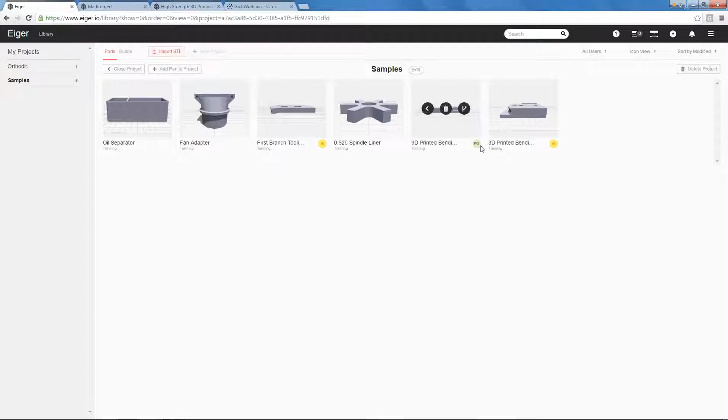I have an orthotic project, which has a sole model in there, which I will talk about when it comes to adding a pause feature to the models, and I also have a samples folder, and these are the sample parts that come with Eiger. These are parts that you can add fiber to, you can print them if you have a printer, but we highly recommend practicing with these particular parts, okay?

Before I get into importing any STLs, I want to just show you the resources. If you come up to the settings and click on support, it'll take you to our Markforged support page, and there's a wealth of information here that you should really review. We have information on getting started, troubleshooting information, the design guide, finishing parts, printer maintenance, advanced tips, and of course we have a frequently asked questions section which you should really go through.

It's a quick read. Down the left-hand column we have a bunch of other articles. It looks like there are a lot of articles, and there are, but they're very short articles, and it should take you no longer than an hour and a half to read through them all. And we recommend going through them as many times as you can so that the information can sink in.

One thing I would like to show you is the actual design guide to show you just how easy it is to create sandwich panels. What Eiger will do automatically is it will try to create sandwich panels on your parts when and where it can. Okay, there are some geometries where it won't, and we'll show you some of those in some upcoming parts. Okay, but what is a sandwich panel?

We're all very familiar with I-beams. And these I-beams have both a flange on the top and on the bottom, and it has a web in the middle. Each of these flanges, this is where the highest bending stresses are. So as such, if you create very rigid structures on both of these flanges, you can create very strong parts.

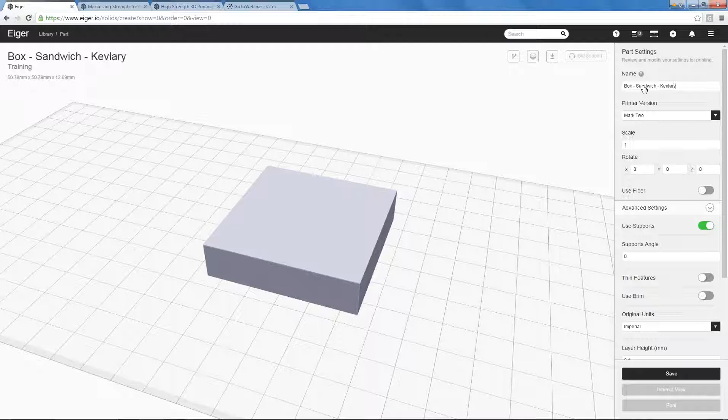Here we can change the name of it, and what I'm going to do is change the name of this box to sandwich, because I'm going to create a sandwich panel construction using Kevlar. I'm going to create different variations of this. The printer version is the Mark II.

Anyone that's joining in that may have a Mark I, I'm not sure if you realize this, maybe you do, but if you click on this printer version, you can actually select. By default, if you have a Mark I printer, the Mark I will show up, but you can actually select the Mark II and slice your parts and add fiber and take advantage of the features of the Mark II. You obviously won't be able to print those on your Mark I, but it'll give you an idea about the advancements with Eiger pertaining to the new Mark II printer.

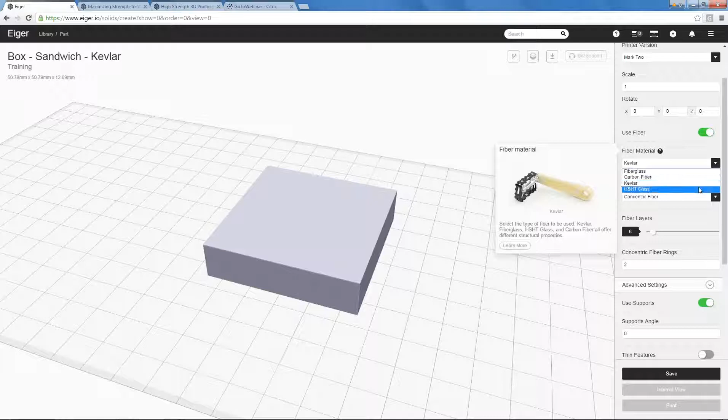This is where you can change the scale. Here you can rotate it on the X, Y, and Z axis, and of course we can use fiber. I'm going to turn fiber on. For most of these parts I'm going to use Kevlar because it best represents on the screen, especially for these demonstration purposes. I'm going to start with concentric fiber, but going back to the material types, I could have chosen fiberglass, carbon fiber, and of course our high strength, high temperature fiberglass. But again, I'm going to just stick with Kevlar for these demonstration models.

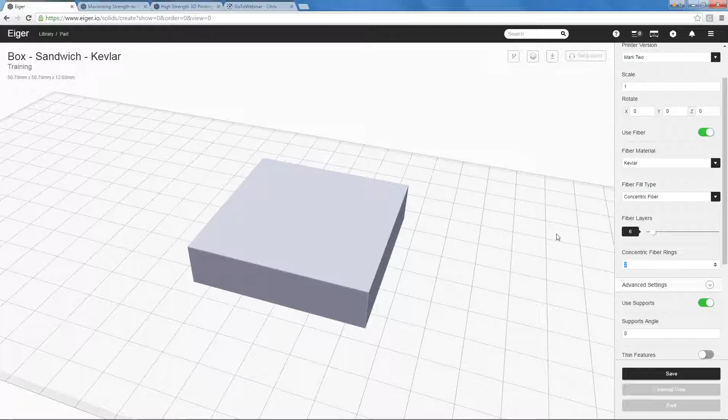And the fiber layers here, the 6 represents that Eiger will create or try to create 3 layers of concentric fiber on the bottom and 3 layers of concentric fiber on the top, hence the sandwich panel construction, and that'll give us 6 overall layers. The concentric fiber rings is set to 2. I'm going to bump this up to 10. You can use whatever you want, but we're just going to start with 10. And we're going to move down and set some of our other settings.

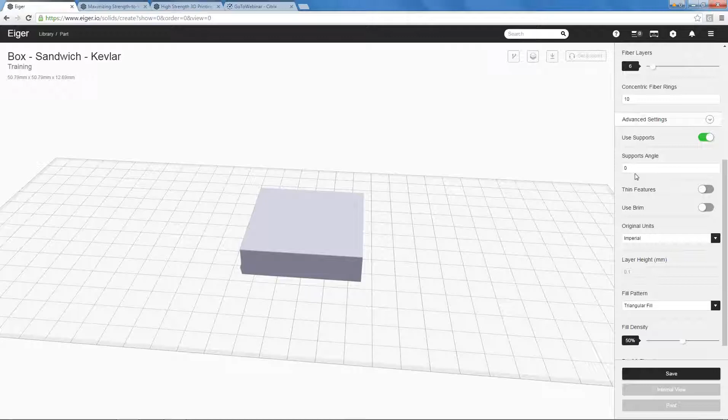Using supports is on by default. For this particular model, since there are no overhangs, supports will not be generated, okay? If there were supports generated, this field will allow us to adjust the support angles, and this can be very handy. By default, it's on 0, but if you had a part that had a very long overhang, using 0 may not be a good idea because you have very long runs of those supports, and by changing it to either 90 or 45 you can reduce the span of those supports, and it can at times prevent those supports from coming free on the build bed.

Okay, we're not going to talk much about this, but I just wanted to point it out and show you that that feature is available. Thin features and use brim, we'll use that in some upcoming parts. Again, my units for the models that I'll be presenting today are imperial, but it's either metric or imperial. The layer height shows you the layer height.

The layer height for nylon is either 0.1 millimeters or 100 microns, or it's 0.125 millimeters or 125 microns. And what the nylon adjusts to is the height of the actual fiber. For Kevlar and fiberglass, the layer height is 0.1 millimeters, 100 microns, so the nylon will adjust to that height. For carbon fiber it is 0.125 millimeters or 125 microns in the nylon. So that's just there for reference.

The fill patterns that you can choose are triangular. I generally use this by default. It produces the strongest part with this particular fill. You have a choice of hexagonal, which we will show, and of course we'll demonstrate when and why you would use rectangular fill. Okay. The fill density, you have total control of the fill density of the internal fill pattern. We're going to leave it on the default.

The roof and floor layers, these are the number of layers that are produced below the fiber layers. What this requires, whenever you put down fiber, it needs a very strong foundation to support the layers of fiber above it, and we will show that just shortly.

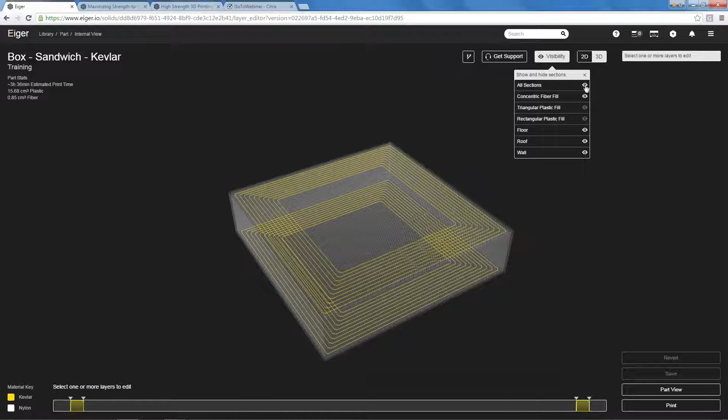Here in our 3D view, we can rotate the part in 3D space. We have a nice visibility tab up here where by default we actually turn off both the triangular plastic fill and the rectangular plastic fill, and we do this for a very good reason. If we turn on the plastic fill, as you can see here, it just makes the part very busy. So since you have the choice, how I view models is I'll usually turn it off. I'll turn on my concentric fiber and my walls, and I'll be able to get a good representation of where my fiber is. But let's return back to the default view.

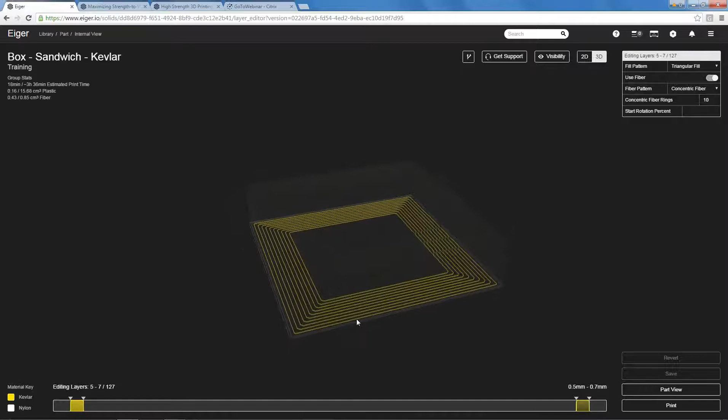Down here is our layer bar, and down here each fiber group is. If I click on it, I can see that I've selected layers 5 through 7, which is on the bottom, so I can highlight those. If I select the upper group, I'm selecting layers 121 through 123, and if I click in the workspace, it returns back to the 3D view.

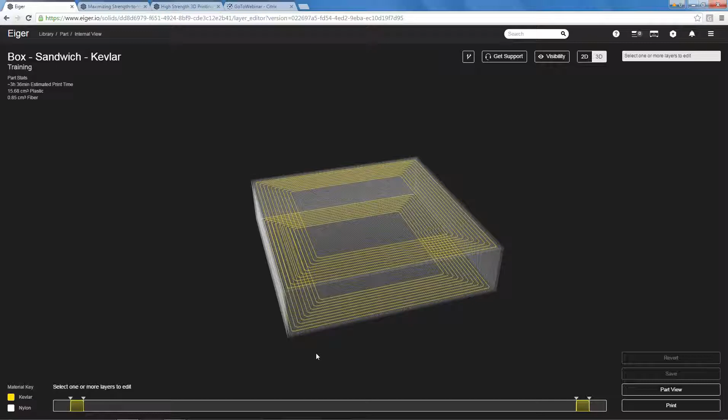Okay, now I can add fiber layers in bulk. In 3D view, we recommend using this view for adding layers of fiber in bulk. I will be adding layers in a clone version of this part, which I'll show in just a second, but let's go to 2D view. 2D view is a view of this part looking down at it in the Z-axis.

If I click in my workspace, I can actually use the right and left arrow keys and progress through the actual layers. Here we can see our 1, 2, 3 lower layers, the bottom of the sandwich panel, and if we scroll all the way up, I can obviously grab the slider and drag it up.

And as I mentioned before, the roof and floor layers are below the layers of the fiber. So below this we'll have 4 floor layers, 1, 2, 3, 4. It's actually 1 roof as designated by the outer stitching, followed by 3 floors, 1, 2, 3, and then of course we have our 3 layers of Kevlar on the top. Very simple. Those layers are added automatically.

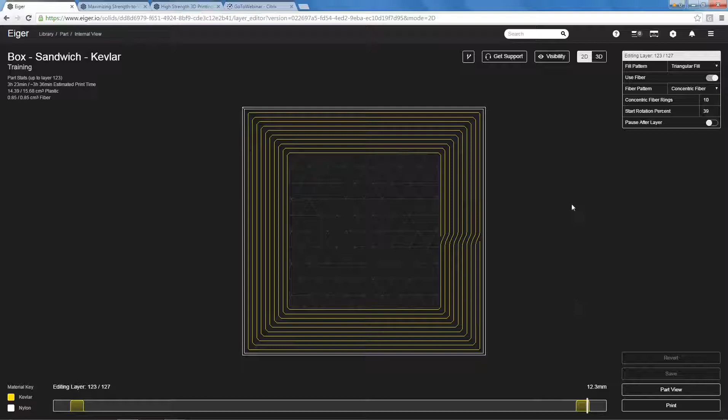You have total control of that within the part settings. I usually use the roof and floor settings and leave it at the default on 4, but you can certainly do whatever you require. I'm going to go back to my part view and go back to my library.

Okay, whenever you have your library, if you're the administrator, you have the ability to invite folks to your organization. Anyone that you invite to your organization will be able to see all of your files. They can open them. They can't change any of your parameters or mess with any of these settings, but what they can do is they can clone it.

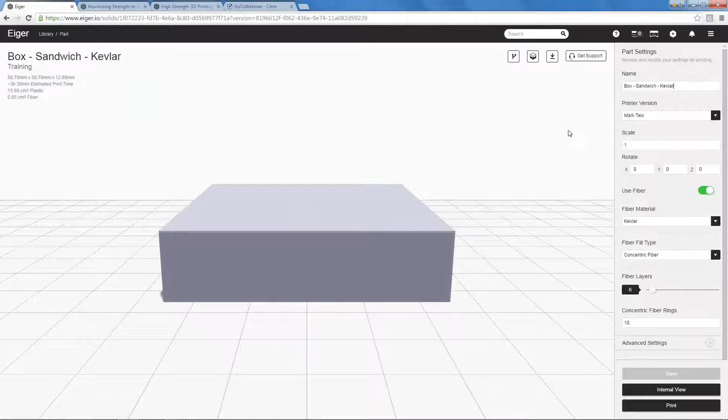What I'm going to do here is clone this particular model again. I'm going to change the name here and add isotropic, because what I want to do here is add some isotropic in the middle. I'm going to save it first to save the name, and if I go to my internal view, I'm going to add some bulk layers of fiber in the 3D view right here.

Now let's say I'm trying to print out different variations of this part. More often than not, a sandwich panel construction creates a very strong part, but let's say there's going to be some torque on this part, and we actually printed it and tested it and there was a little flex in it, and we want to eliminate any torsion or any flex. What we can do is add a group of layers of fiber in the middle.

I'm just selecting a random amount here, and what it does, it highlights the area in the middle as seen in the 3D view, and what I can do is then go to the actual,

I'm sorry, I got this other window in my way. I have to move it out of the way. I apologize.

So I'm going to go down here again and select a selection of layers in the midsection. I'm going to turn fiber on. Concentric was what I had by default, but I want to use isotropic. Anytime you add isotropic to the midsection, this can help reduce or eliminate any torsion or twist that may present itself in a part when it's used in its application. So I'm going to show just how easy that is to do now.

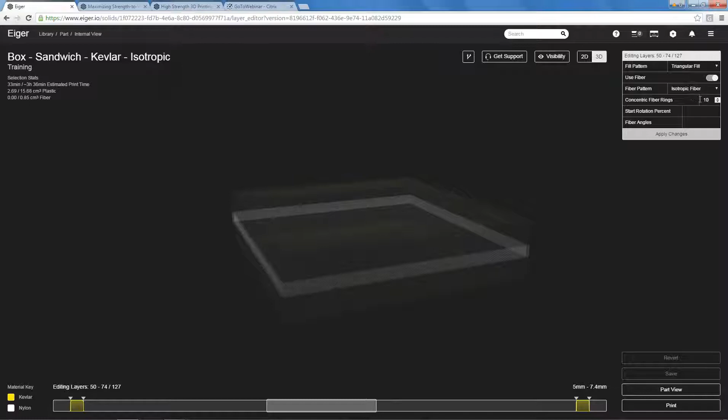Now, with isotropic on, if I leave the value of 10 in the concentric fiber rings there, it's going to have a mixture of both isotropic and concentric. I'm going to apply those changes and show you exactly what that's doing. So if we rotate that, we saw in real time how it added those layers of fiber. Right now I can see my 10 outer rings, that's the concentric, and we can see our inner matrix of our isotropic fiber.

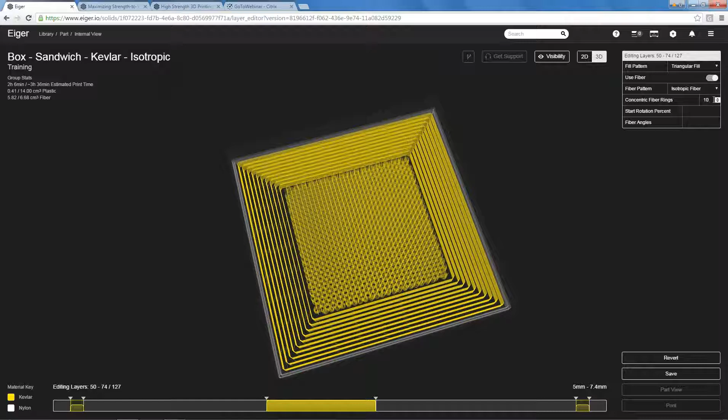If I want to go with just isotropic only, which is what I want for this, I can change this from 10 to 0, and we can see that it changed to isotropic. If I click in the workspace, we can see that we have the sandwich panels on the top with concentric fiber, and we have our isotropic in the middle based on our group selection in the layer bar.

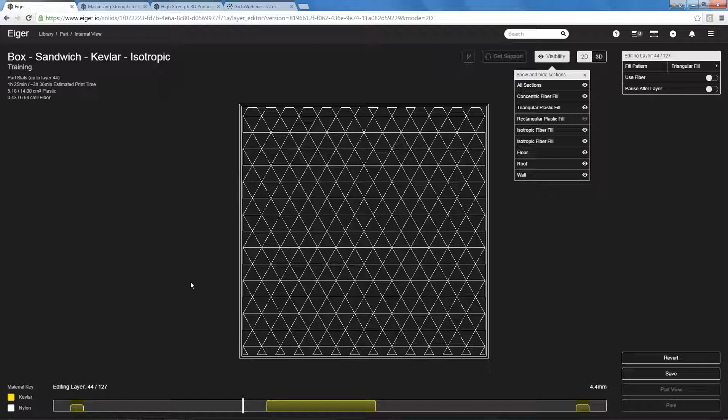If we go to 2D mode, we can take our slider and slide it through. We can see our lower sandwich panel, concentric, and slide it all the way through. At this point, if we wanted to, we could turn on the plastic fills so we could see the triangles. As I mentioned before, there's going to be a roof and 3 floors below these layers of fiber. Let me click on my workspace here, and we have our roof and 3 floors below it, because we need a nice sturdy foundation of 100% nylon so that these upper layers of isotropic fiber can sit on that and adhere to it nicely.

So if we go through these particular layers and look at the fiber angle up here, it starts at 45. It then goes to 90 on layer 51, then on layer 52 it goes to 135, and it's going to alternate those fiber angles throughout this particular fiber group. What this cross-linking provides is a very strong bond of these layers in its isotropic nature. Okay, very simple. So I'm going to save this part.

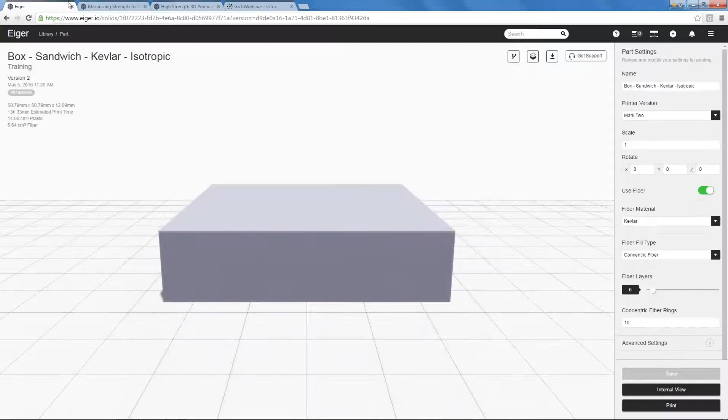I will close this down. I'll go back to 3D view. And I now have a second version of this model. I'll go back to part view and go to my library. What I can do now is create a new project. It's very easy to create a new project. I'm going to call this boxes.

I'll save it. And what I can do is simply drag both of these parts into there. Okay. What I want to do now is open this project, and what I can do is I can import a new box in there. And I'm going to go and import a fresh new box. Now, in cases like this, first I have to go down and change it from metric to imperial.

I have two versions. I have a sandwich panel box. I have a box with some isotropic in the midsection. And now what I want to do is create a box that has 100% Kevlar in it. Okay, it's very rare when you have to fill parts completely with a fiber of your choice. You tend to do so more so with much smaller parts. But for a part like this, you probably wouldn't have to do it. But I'm going to do it just to show you how easy it is to do in Eiger.

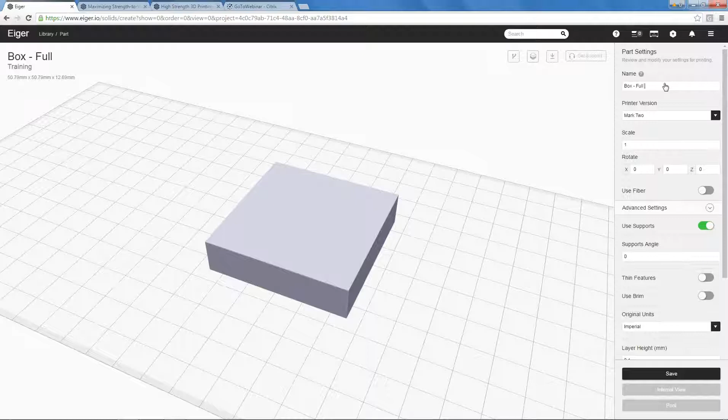Okay, so by coming over here, I'm going to scroll up in the parts settings. I'll give this a new name and I'll call it full Kevlar. I'm not going to change anything with the scale. I'm not going to change anything with the rotation. I will turn on use fiber.

What I'm going to do here though is for the fiber layers, if I left it at 6, it's going to try to create 3 concentric rings at the bottom and 3 at the top, but instead of doing that, I want to slide the slider all the way to the right to 127, and what Eiger is going to do here is try to fill this part up, all 127 layers, with concentric fiber.

Now, instead of 2 concentric rings, I want to have as many rings as humanly possible which go towards the center of the part, and by doing so, I can put in a very high value, like an infinity value. So putting 1,000 in, or even a higher value, will ensure that I'm able to add as many rings as possible to this part, and it will reach as close to the center as it can.

It's okay if I have the use supports button on. Again, there's no overhang, so it's not going to create any supports for this part. Thin features and brim, I don't need to use those. We'll use those in an upcoming part.

And of course, instead of having a triangular fill, I'm going to switch to a rectangular fill. And a rectangular fill is a layer with 100% fill density, but in order to get to 100% fill density, I have to move this slider all the way to the right. So rectangular fill, 100% fill density on all the layers will produce a box, in this case, which is 100% nylon. Let's go and select it here.

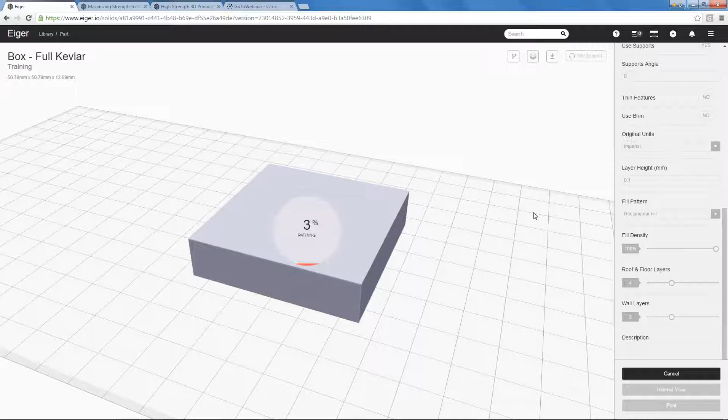Now, you always want to refer up to the left. This is a wealth of information up here as well. It gives us our extents. It gives us our approximate print time, which is approximately 15 hours and 40 minutes. However, this print time is an approximation. You will know the exact print time when you send it to the printer, and on the LCD touchscreen, you will actually see the print time on the screen.

99% of the time, the print time is less. In this case, it's probably around 12 hours to print instead of the 15, but it can vary. Here it shows that it's using 4.41 cubic centimeters of plastic, or nylon, and it's using 27.94, or close to 28 cubic centimeters of fiber.

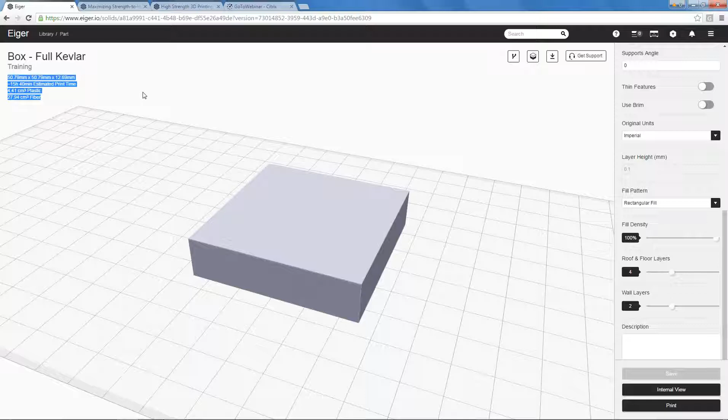Okay. Now let's take a look and see what this looks like internally in our 3D view. Actually, I used fiberglass by mistake, which is fine. We can see that this box is completely filled with fiberglass. I'll go back and change the name. That's okay. Actually, let's go back to the part view. I want to change it to Kevlar. It's easy to see, so I'll just save it again. Let it slice, reslice.

None of these values are going to change. They're going to stay the same. And we'll go back to our internal view. And here it's just a brighter representation. So this is, as it shows by the layer bar, a box which is completely filled with Kevlar.

If we go to our 2D view, we can look at each layer. We can take the slider and slide it through it, or we can use the arrow keys, and we can see that this is as much fiber in a concentric pattern that can be added to this part based on our settings, okay?

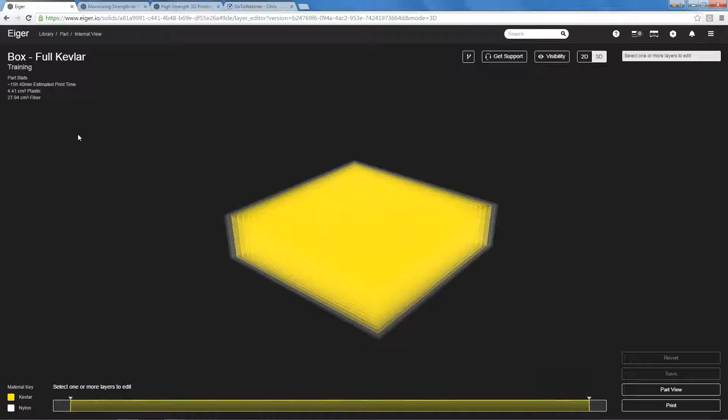Now, one of the things that is worth knowing at this point, let's say I wanted to print 3 of these. One of the great features that's in Eiger is it has a pause function, okay? Since we have 28 cubic centimeters of fiber, I'm going to go back to 2D mode, actually. Let's say I wanted to print 3 of these boxes out, okay?

Well, each spool of fiber, whether it be Kevlar, fiberglass, or even carbon fiber, there's only 50 cubic centimeters of fiber on those spools. So if I were to print 3 of these, that would give me 28 times 3, 84 cubic centimeters, and that exceeds 1 spool. So I have to take that into consideration.

I can easily create a pause and anticipate that by taking my slider, and let's say I want to get to the midsection. Let's go to layer, let's say 68. And what that gives me is 15 cubic centimeters of fiber. So if I create a pause at this particular layer, and I have 3 of them printing, it'll use up only 45 cubic centimeters of, in this case, Kevlar. And it'll allow me to change the spool.

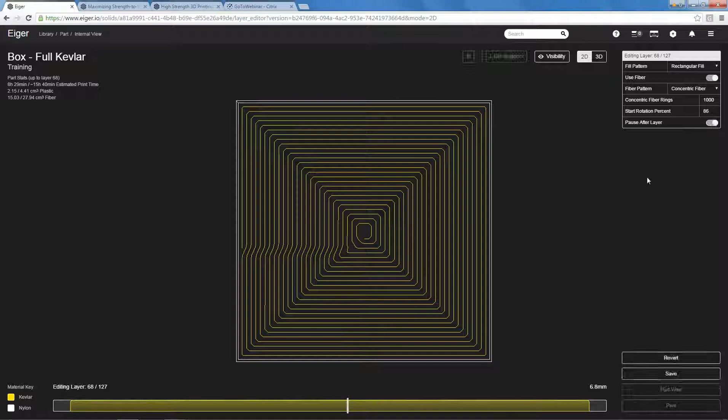So it's very simple to create a pause. All you do is you come up to here, you create a pause by sliding that on, and it creates the pause. I'm going to save it. And I'm going to show you just how easy it is to print this and add additional parts to it. Okay? I'm going to go to the print. In this case, I'm not connected to any printers. Well, let's first add 2 additional parts to it as we originally planned.

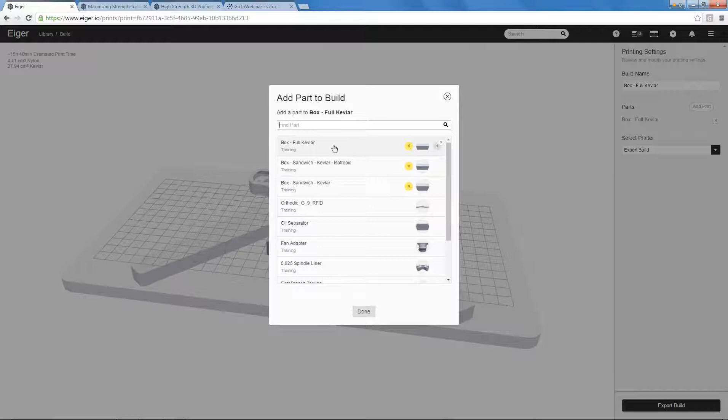I can click the Add Part button. And here's the one part, the box full Kevlar. I'm going to click on it once. I'm going to click on it twice. So I have 3 parts, and they've been auto-placed on the build bed, and it indeed shows us that we have almost 84 cubic centimeters of Kevlar. We have our pause at layer 68, so we're good to have a pause and add a new spool of fiber. Now, if I wanted to print this, I could easily select the printer from my drop-down.

I don't have any printers online, but one of the other features, for example, I have a Mark 1 at home, and my Wi-Fi at home is not great. So what I often do is instead of connecting to it via Wi-Fi, I actually export the builds as MFP files. An MFP file is a Markforged print file. And this is an actual file that you can load to a USB thumb drive, insert on the back of the printer, and print from that device. I'm going to click on that now.

And the great thing about Eiger is it gives you this warning. It says this print uses more than a full spool worth of fiber, which we already knew. This print will not complete properly unless you pause it before the spool runs out and replace the spool. Now you can always manually pause it, but it's a best practice to create the pause within Eiger. You may forget about it as it's printing, and you'd certainly hate to see a build go to waste by missing out on an opportunity to change the spools. So here we've already created the pause, and we're good to go.

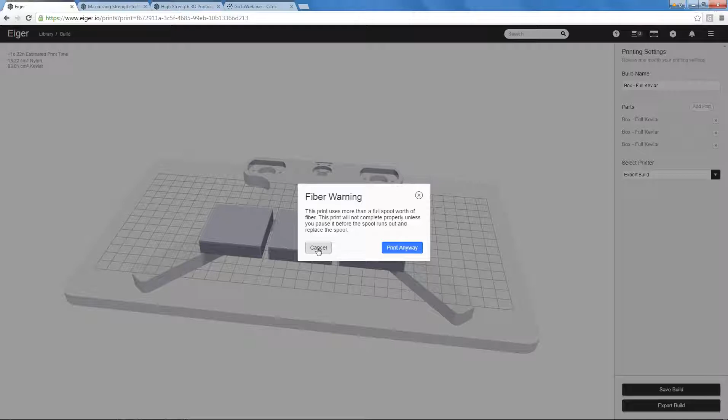If I print anyways, this will create the MFP file for me, and I can put that on a USB thumb drive formatted as FAT32, and print from that storage device. Okay, but I'm going to cancel this right now. Now I do want to show you another part and show why adding a pause is very advantageous. Let's go back to my library here. But before I do that, I do want to create one more box part.

Okay, we've created 3 different variations. We've created a sandwich panel construction. We've just created one with full Kevlar, and then we have one with sandwich panel with isotropic layers in the middle. Now, let's say you had a part that you wanted to print just nylon, and you can easily do that very simply within Eiger.

I'm going to select one more box. I've got to change my units to imperial. And to change this to 100% nylon, it's very simple. I'm going to come in and give it a new name, full nylon.

Nothing else is going to change here. I'm not going to turn on fiber because I don't want fiber. Again, it's okay if I have the supports on. Those supports will be generated anyways. And what I'm going to do is I'm going to come down here, and in order to get full, I'm going to select rectangular.

Can you show how to duplicate parts a second time? What's that? Show how to duplicate parts a second time when you get a chance? Oh, you mean just like to clone it? Okay, we'll do that. Absolutely. I'll do that next.

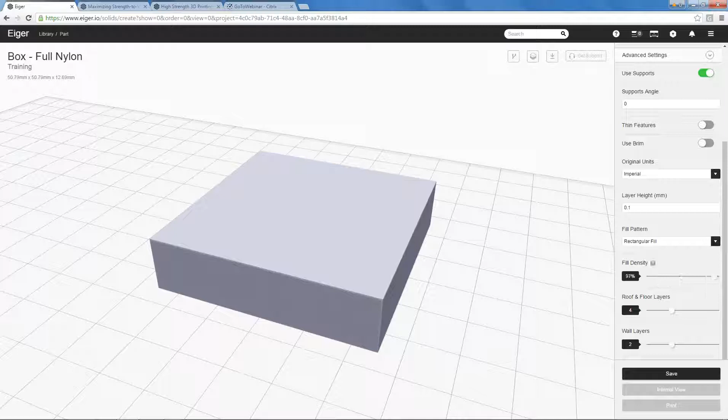So in order to create a full part with 100% nylon, instead of selecting a triangular fill, which would generate triangular fill, or hexagonal fill, which is hexagonal fill, we're going to create a rectangular fill. And this is a layer with 100% nylon, and I'm going to slide that all the way to 100%. I'm going to click Save. And if we go to our internal view, we have here a part which is 100% nylon, okay?

If I go to my 2D view, we can see the outer walls and the inner nozzle path of the nylon nozzle, and if we step through it, well, we had to turn on the visibility of the inside there. We can see the alternating paths all the way throughout this part, and this will create a 100% nylon part, okay? Very simple to do.

Now, one of the things that I can also do to make this even stronger, as I mentioned before, I can actually slide the wall layers to 4 and have 4 outer walls instead of the default 2. I'm just going to do that now, just so that it ensures that I have a full nylon part with as many outside walls as possible. So if we come back into our internal view and go to 2D view, we can see that we have our 4 outer walls, 1, 2, 3, 4, and then we have our inner nylon, okay?

Let's go back to our library. And someone had asked the question how to clone the part. Yeah, it's very simple to do. If you click on it, you have an option to delete it. We don't want to delete it, but if you click this button here, we can clone it. And this is our full nylon one, so if we click on that, it creates a full nylon part, okay?

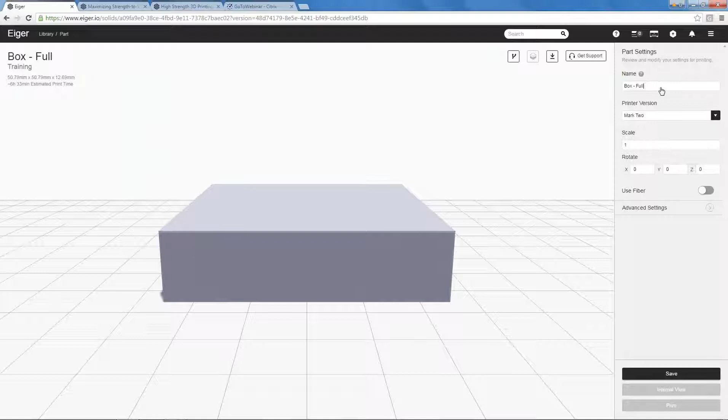Now, the only problem is the clone doesn't end up in the project, so if we close the project, it ends up outside. We can click on it. We can change the name. We'll just call this duplicate and save it. We come to our library, we can drag that right into our boxes, so now we have 5 boxes here.

Now, if at any time you accidentally delete the project folder, it's not going to delete the whole folder containing all of the parts. Instead, it'll delete the project, the index, but it's going to add all those parts externally here, and I'll show you that right now, just show you what's going to happen. It just basically brings those all out into the parts library, okay?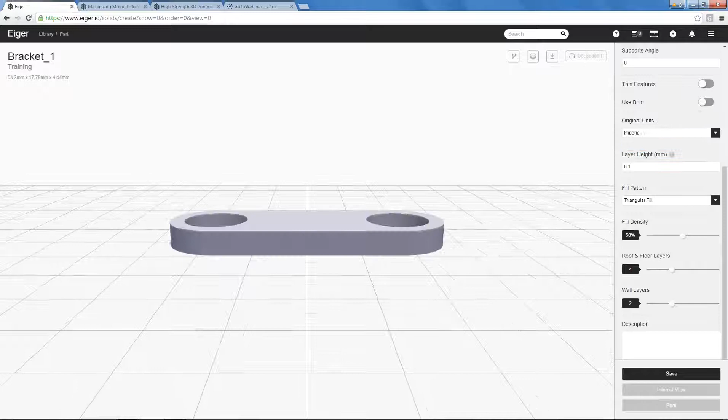So what I'm going to do is I'm going to move on to some other parts. I'm going to move on to a bracket, okay? We're going to learn a little more about the features of Eiger. I'm going to go through some of these settings a little quicker. I think you're getting the gist of it, just how easy it is. Had to switch to imperial because it is in inches. Here I have a particular part. This part is on the small side.

So for this particular part A, I want to fill this with 100%. Again, I'm going to use Kevlar because it represents well on screen for these demonstrations. So I'm going to change the name, and I'm going to call it Full Kevlar. You can name it anything you want. I don't need to change the scale. I'm going to turn on Use Fiber. I'm going to use Kevlar.

I want to use concentric fiber. What I'm going to do is slide the slider all the way to the right to 36 layers. The concentric rings I'm going to change to 10. I know that based on experience, it's more than enough to fill this. I'm going to go to my advanced settings. Although supports is on, there's no overhang, so I don't have to worry about supports being generated. We'll touch on thin features in just a moment. I'm going to leave all of the other defaults, and I'm going to click the Save button.

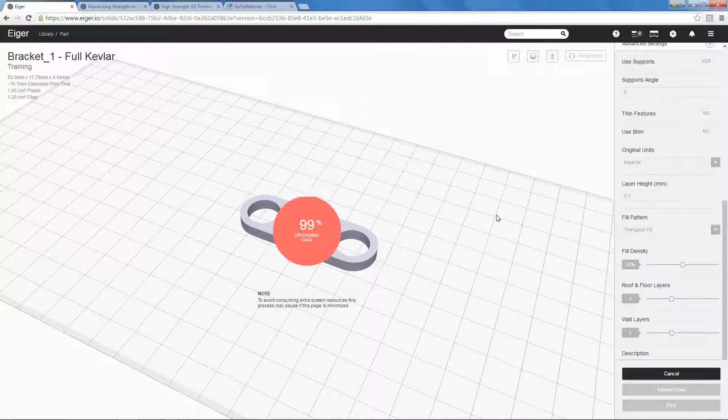Now, in the upper left, always refer up here. It shows us our extents. It shows us our approximate build time. It shows that we're using 1.5 cubic centimeters of nylon and almost 1.3 cubic centimeters of fiber. But let's take a look at our part internally.

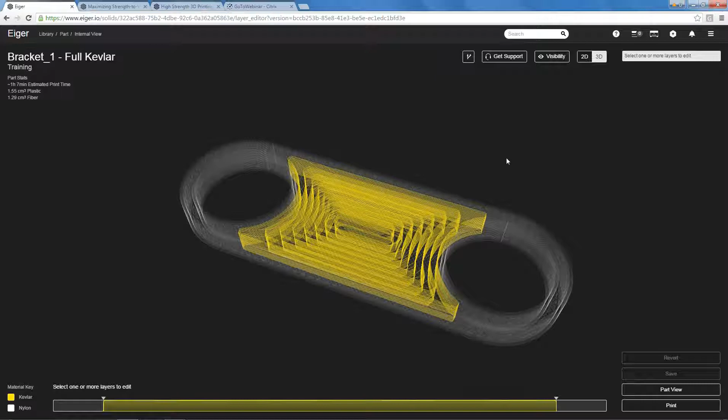Here we can see our part, and we can certainly see that we've added fiber to the midsection of this part. But where we didn't add it is in the most important areas, along the outer walls of this part. Now, using some of the other features in Eiger, we can certainly see if we can add more fiber, but let's take a look at this in 2D mode and get a little more explanation as to what's going on.

One of the great features about the Mark II is its minimum fiber length. The minimum fiber length that needs to be printed is only 40 millimeters. On the Mark I, the minimum fiber length that had to be printed was about 610 millimeters. So the advancements of the Mark II are great, and reducing the minimum fiber length to 40 millimeters allows us to fit fiber into much smaller areas.

Now, if we look at our cross-sectional area here, I'm going to turn on this so we can see it. Actually, let me turn it off. It's a little too busy. We can see that we're trying to fit fiber in this area here. Now, the cross-sectional area that you need in order to sustain that minimum fiber length of 40 millimeters is approximately 45 square millimeters, which is not a lot.

So in this area here, we weren't able to add any fiber, but what can we do here to increase the cross-sectional area? Well, we have 2 walls, and that was set by default. If we remove one of these walls, that'll give us a larger cross-sectional area, and that may allow us to add more fiber. So let's go to our part view, and let's change that setting in our advanced features from 2 down to 1. We will save that.

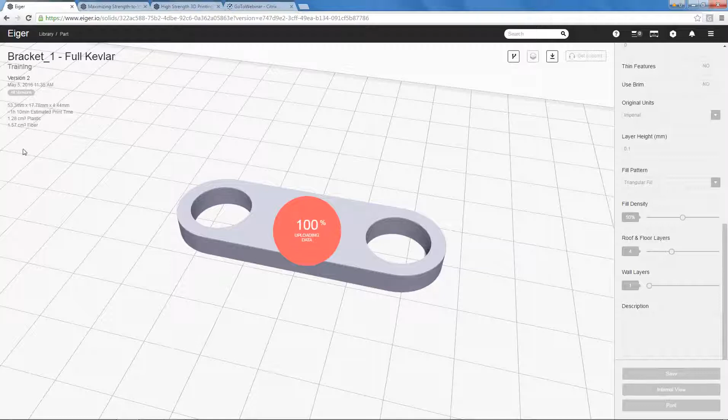And we can see that it's added a little more fiber. Let's go internally. We were able to add one more ring of fiber there, and that's great. One is better than none. If we go to our 2D view and scroll up to layer 20, we can indeed see that by going from 2 walls down to 1, we were able to create more cross-sectional area so that we have more fiber, in this case Kevlar, in those outer walls.

We got a good question about whether the lines that you see on the screen in the 2D or 3D views represent the actual fiber paths, or is it just a representation of the pattern that we're adding to that area? That's a great question. I'll answer that in just 1 second, but thank you. That's a very good question.

Just to answer it briefly now, the white represents the nylon nozzle path. It'll extrude nylon. The nylon width is 0.4 millimeters. And of course the fiber is represented by the yellow. There are 2 nozzles on the Mark II: the nylon nozzle and the fiber nozzle. The yellow represents the fiber nozzle path, and the width of that is 0.9 millimeters. But we'll take a look at that more closely in just a second.

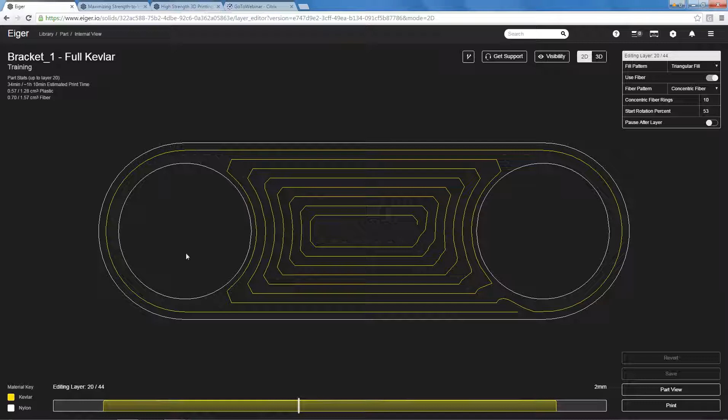But getting back to this, I have 1 ring of fiber in here. I'd like to try to squeeze in 2. Can I do that? It's a possibility, provided that I'm willing to make a compromise. If I come down to my advanced settings, one of the settings that we have in here is using thin features. Now, thin features, let's open up the help button.

Anytime you click on one of these question marks, the help button will come up, and it says this will preserve thin features. Select this feature if your part has extremely thin walls you need to preserve at the expense of some dimensional accuracy. If I turn this on, more often than not, it allows for the addition of more fiber. However, it will alter my dimensional accuracy.

For my particular part here, and what its intended application is, I have some clearance here for the actual holes that the bolts will go through. The outer walls will not bump up against anything, so if it's a little larger, I'm okay with it. So I have some wiggle room, and I'm okay with compromising some dimensional accuracy for this particular part.

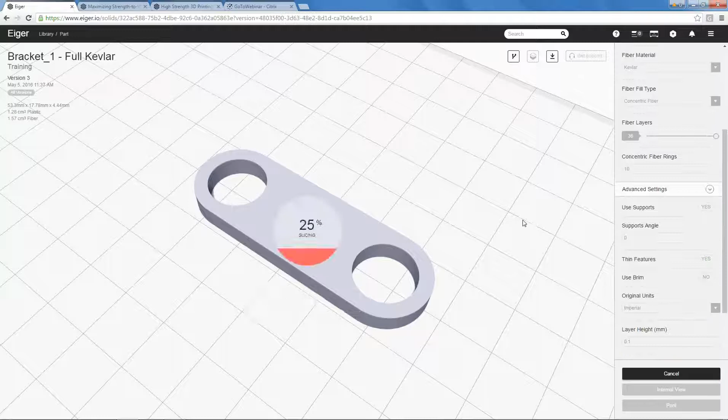So as such, if I turn on thin features, this may allow me some more fiber. So turning that on, I'm going to click Save. And if we go to our internal view, we can indeed see by turning on thin features, we were able to add another ring of Kevlar around the outside. Okay, now getting back to that question, we can see the 2 rings there.

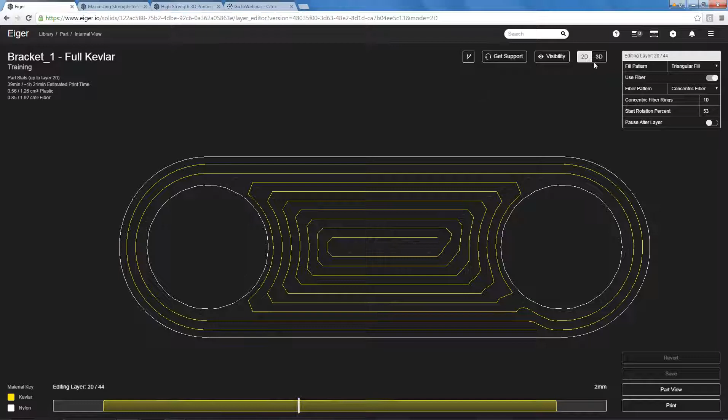So in this particular case, this is the type of part that I would want to print. Because I have it now completely filled with Kevlar, and because it's not going to bump up against anything, it only has 1 outer wall, I'm okay with that. It has, again, a full fill of Kevlar supporting it behind it. So this is going to be a great part for me to print. It's going to be super strong, and it's going to fit my intended application and meet the strength requirements.

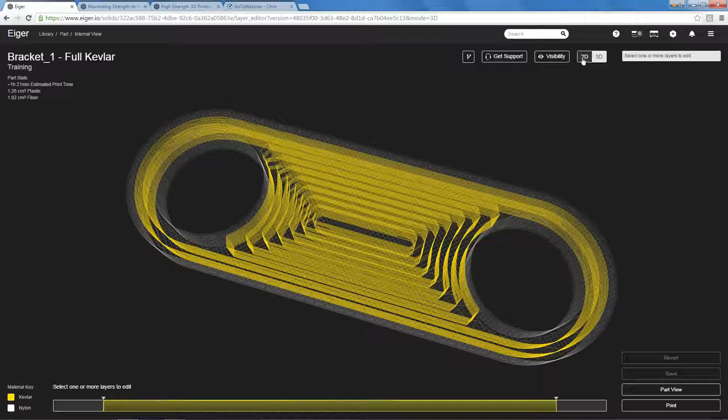Going back to the question about the paths, that's a great question. We'll start on layer 1 here. We have our outer wall. These lines here are the nylon paths. So this will be the nylon nozzle extruding along these paths. And if we go to layer 2, it's going to alternate, and it will follow those paths.

And if we come up to the fiber, we will turn on the visibility so we can see the fill inside. So wherever there's white, it will extrude nylon. Wherever it's yellow, the fiber nozzle will extrude, in this case, Kevlar material. Any areas where it cannot put in fiber, it's going to put in nylon. So I hope I answered that question okay, and thank you for that question.

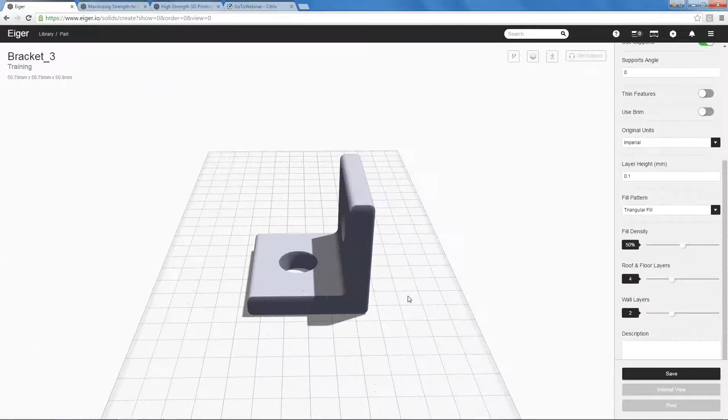All right, so we'll go back to our part view. We're going to go back to our library. We're going to bring in another part. We're going to put in another bracket, okay? And in this case, we're going to show how you orient your part is very crucial when it comes to adding fiber. In this case, I'm going to go to Imperial. And here we have this bracket. We obviously want strength in both sides of this bracket.

What I want to do is try to fill this up 100% with fiber. I'm going to come down and turn on fiber. I'm going to use Kevlar again. Again, I like using it for demonstration purposes. I'm going to use concentric fiber. I'm going to take the slider. If I leave 6, it's going to try to create a sandwich panel, but we don't want to do that. We want to try to fill up this part, all 500 layers, with concentric fiber.

In this case, I'm going to give it a value of 10 concentric rings. And again, you can change this, you can play around with it and experiment. There is a lot of experimentation, but as you get familiar with it, you'll get a better feel as to which values you need to plug in for certain types of parts.

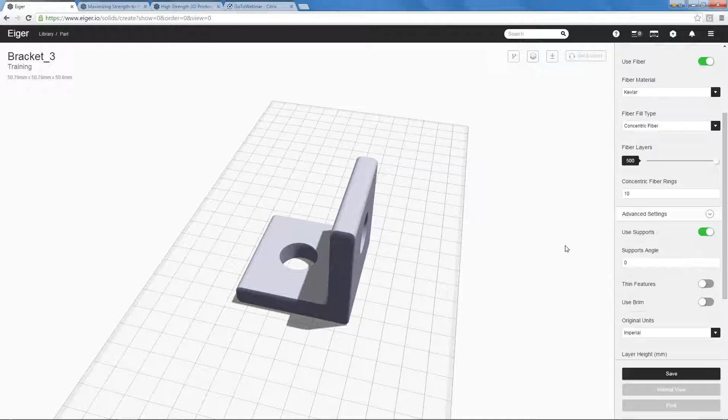Using supports, I certainly want supports on because I need supports in that hole, so in this case supports will be generated. I'm going to leave the support angle at 0. We certainly don't want to change the angle of those supports. In this case here, we'll use the brim feature in just a moment to show that feature. And I'm going to click Save and see what this generates for us.

Okay, if we go to our internal view, we can indeed see that this is filled with fiber. The fiber surrounds this hole very nicely. We can see the support structures. If we want to see just the support structures, we can select that and see that it is indeed there. But instead,

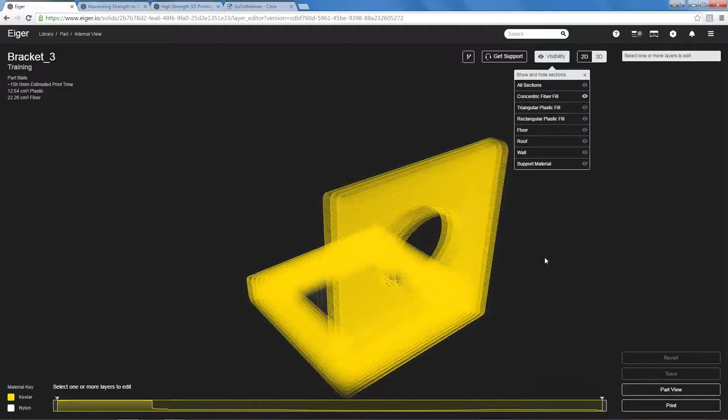here we have a problem. We don't have enough concentric fiber around this bottom hole. And the reality is, if we zoom in on it, let's just take a look at just the concentric fiber itself. We can see that the length of this fiber is going in the wrong direction. The strength of the fiber is in the direction that it travels, and we don't want the strength in this axis.

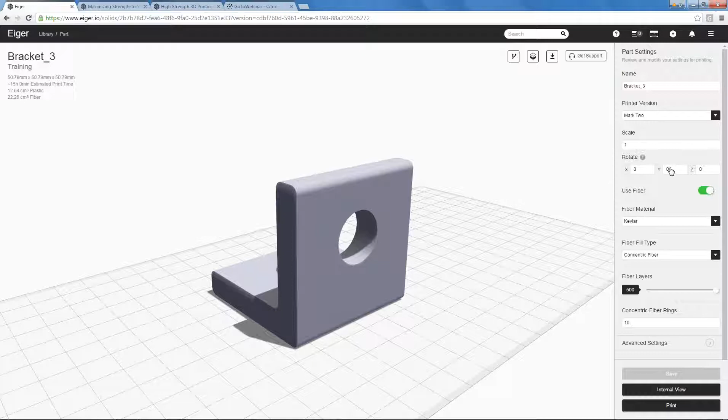We want it on the edges of this bracket so it can be very, very strong. So we can easily change that. Let's go change that by going back to our part view and reorienting this part for optimal fiber placement. What I'm going to do is I'm going to put 90. I'm going to lay it down. Okay, and what that's going to allow, it's going to allow concentric to fill up both sides of the bracket, and that's going to allow for the best fiber placement for this particular part.

Okay, you can obviously have different variations of fiber, but for demonstration purposes, we're just going to stick with the concentric fiber. But what I am also going to add to this part, because the footprint of this part is a lot smaller than it was when it was sitting flat, we have this footprint of the base. I want to use the brim feature. What the brim feature does nicely is it adds a wider base to the part, and it allows it to, one, maintain its flatness, and two, it will also help from having the part come dislodged from the actual print bed.

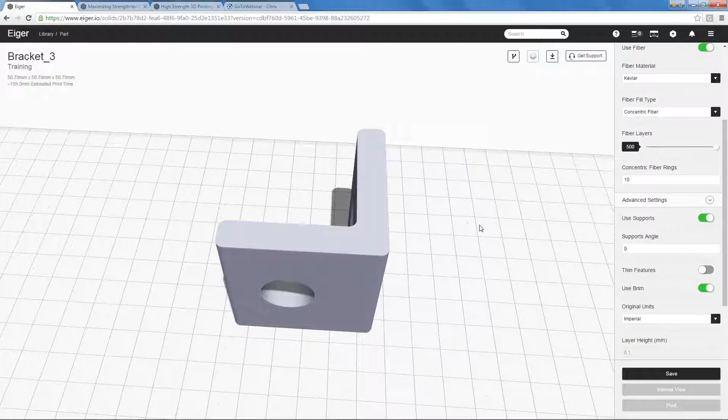This print bed, it's not heated. It's a print bed that we use an Elmer's glue stick. It's a disappearing glue, and this part may be okay without a brim, but just for insurance reasons, I want to add the brim to it. And again, it'll create a wider footprint so that it better adheres to the build plate. And this feature becomes more useful when it comes to much smaller parts. But we're going to show it here again for demonstration purpose.

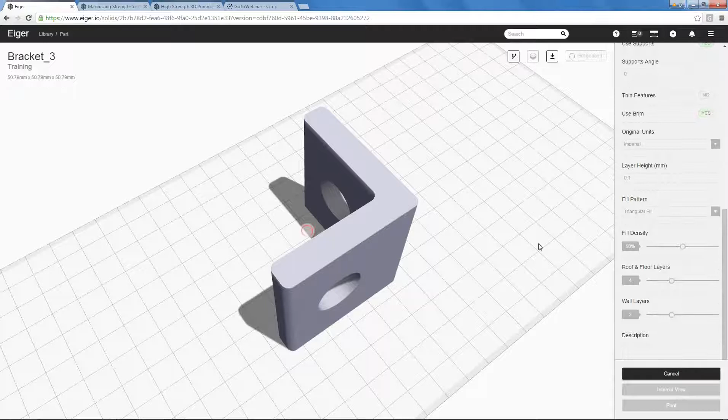I'm going to leave all the settings the same. I'm going to click the Save button. And let it finish slicing. And now it's complete. We'll go to our internal view. And here we can see that this has concentric fiber layout. The fiber is running in a nice direction. It's surrounding the holes. We have our brim. Let's take a look at this brim in 2D mode. What this brim is, it's 5 layers of nylon.

Okay. Now again, what I want to point out here is you always want to look at the part stats in the upper left. This is at this layer here, it's 19 minutes. This overall, it's going to take approximately 15 hours and 49 minutes estimated print time. Again, this print time is an estimation. The actual print time will show up on the LCD screen when you send the build to the printer.

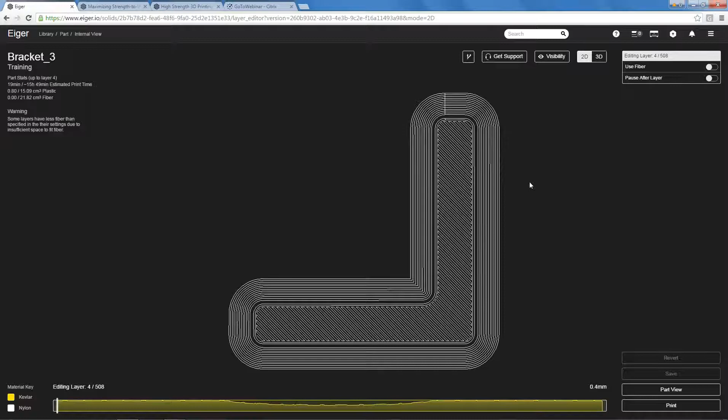Okay. Here, we're going to just take a look at the brim real quick in 2D mode. It's 5 layers of just strictly nylon. The first one, second, third, fourth, fifth. Now, what you need to see is that there's an actual gap around this, and what this gap provides to us is that there will be some bleeding of the nylon, and when it bleeds into it, it creates kind of like a perforation. So when this part is complete and you remove it from the build bed, you can generally pull this right off with your hand. So it's a great feature, and you should really take advantage of it, especially when needed.

And if we go through this with the slider, we can see that we indeed have our concentric fiber throughout the part. We can see that it's filling up these islands very nicely. We have our supports supporting the holes. And we can see that it finishes off. Now this down here, a lot of folks ask, what does this representation down here mean? Well, this is a representation of the fiber. Again, this is our layer bar, and this is a representation of the fiber as it's used throughout the part. These lower valleys is where less fiber is used, and it's referencing the layer with the most fiber.

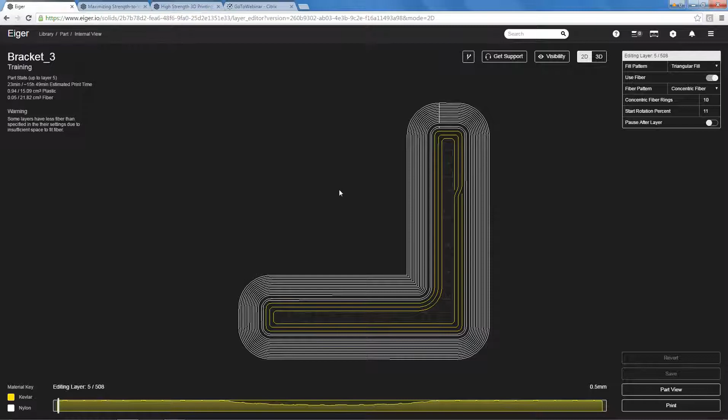Okay, so if we go all the way to layer 5, for example, this layer has the most fiber that was able to be squeezed into this part, and of course if we come to the midsection where we have our holes, we have less fiber. So this is a representation based on the layer with the most fiber. Okay, it's a good reference to look at.

Let's go back to our part view, and here we have our part. Now let's say we wanted to print this part again. We can simply go to print, and we can go up and we can add the parts. In this case, we can go up to our selection. We can add any part to our build bed as long as it's the same material type as the part that we have in there currently.

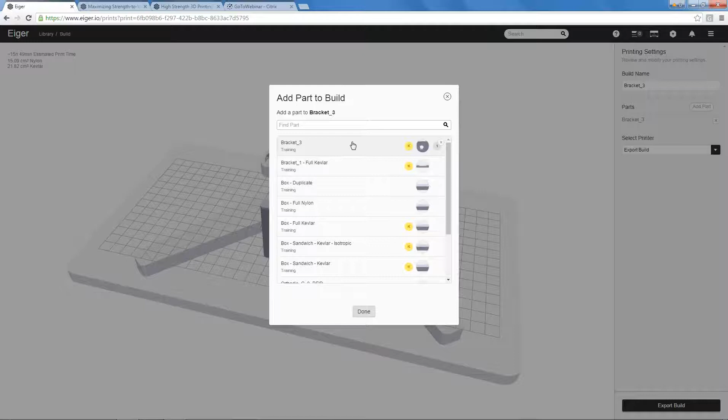Since we have Kevlar, we can add any other Kevlar parts we want. We could add strictly nylon parts to it. The thing we can't do is mix materials. We can't mix carbon fiber parts with nylon or with fiberglass parts. What I want to do is add 2 more parts to this, so I'll click on it 2 more times.

I'll close this, and I can select these in the workspace and move them around. Now the one thing you have to take into account is that this does have a brim around the base, so we want to make sure that those brims don't collide. So we want to give it a little more room. We could probably push them closer if we want, but I'm just showing how easy it is to move around.

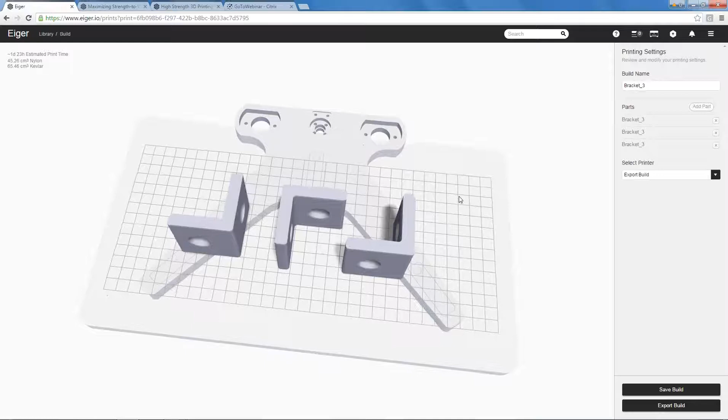Okay, if we zoom out, which is a nice feature, we can actually see the actual printer and how the parts are oriented. It's very cool. Nice thing to play around with, impress your friends. We can then export this build, or again we can print this directly to the printer if we had a printer online. Very simple. Okay, let's go back to our library.

One of the things that I did want to show with adding a pause was this orthotic model, and then I'll move to the final part, which is the manual brake lever. I want to click on this part, and having the pause feature is great. Here's an orthotic part. We're going to go into the internal view.

There are 2 cavities that have been added to this part. There's a cavity in the heel, which was designed to have a pressure sensor, and there's also a cavity in the midsection for an RFID tag. So in these cavities, you can design parts to hold electronic components such as pressure sensors or RFID labels, or you can insert hard mounting points like nuts so that you can screw other parts that you've printed together and create a much larger assembly.

Now in this case, I'm clicking in the workspace so I can use the right arrow key. Here we can see our cavity that's been created, and we want to create a pause at the right time. That right time for the heel, where this cavity is opened up, I actually have to come to visibility and turn this on, is right before it closes off. This is the layer closing off that cavity as we're looking down at it from the top in the Z-axis.

So I want to create a pause at layer 11. I'm simply going to toggle that pause button on. What it will do is pause after this layer, and it will also send you an email notifying you that you can come and remove your part from the bed.

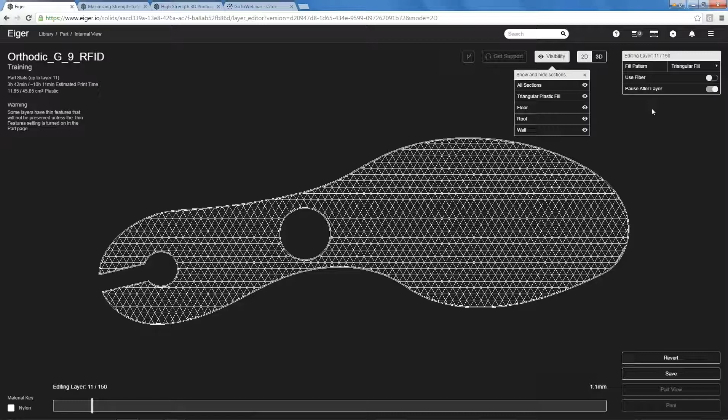You can actually remove the whole build plate. It's on a kinematic coupling, and you can go over to your workbench, insert that pressure sensor, and return the plate back to the printer. It's accurate within 10 microns repeatability, and then you can resume the print by simply selecting resume on the LCD touchscreen. But before we go to that, we want to create a second pause so that we can add the RFID label here.

So where would we add this next one? Well, layer 17 is where it starts to close that particular cavity. So we would want to create a pause on layer 16 before that cavity closes over. And again, it would send us a second email notification. We would come to the part, take out the build bed, add the RFID tag, return it back, press resume, and we would be on our way to embedding those parts or overprinting them.

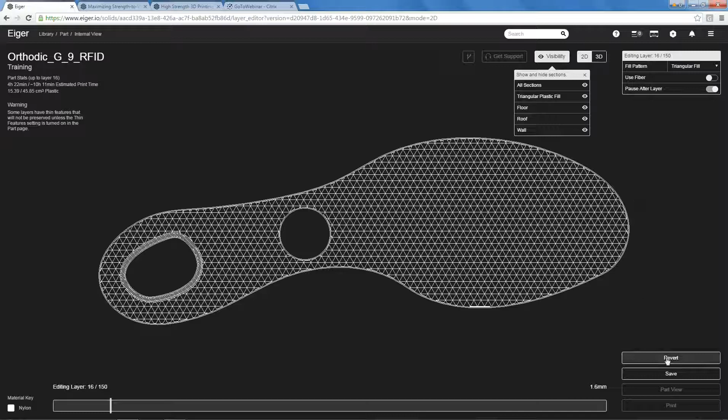Okay. If at any time you do add some fiber and whatnot, you can come in and revert back to that particular original save setting. So by clicking revert, it erases those pauses.

Okay. I do want to go to the library right now and go back to one part just to show something. Let me close this project. I want to come back to this bracket, for example. Let's say you wanted to create a variation of this, but you didn't want it to have all of the fiber that was in there. I'm going to clone it again.

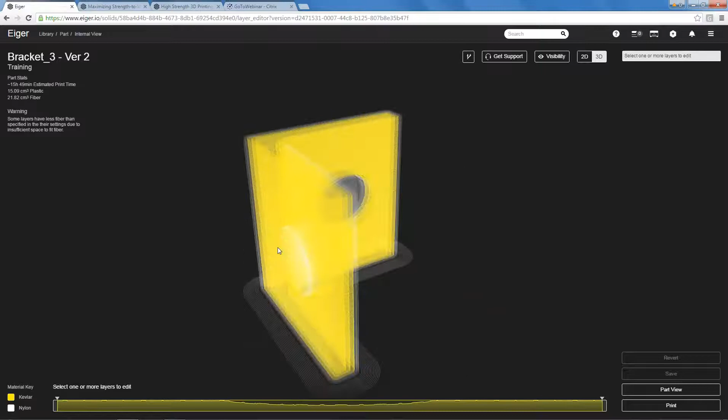Okay, so this is a clone, and I'll just give it version 2. And in this case, when I save it and I go to the internal view, one of the nice features about working with the layer bar is that you can go in and modify your fiber layout whenever you want. I may want to print out a version like this, but maybe I don't want to use that much Kevlar or fiberglass or carbon fiber, whichever fiber it was that I selected.

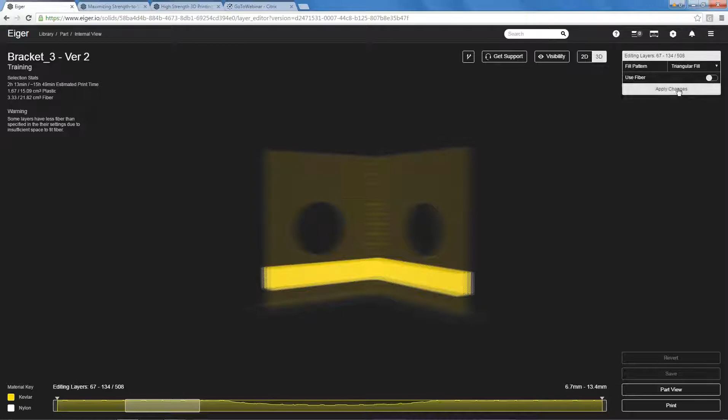I can easily come in within 3D mode. Like we were able to add bulk layers, I can subtract bulk layers. So let's say I want to remove some of these layers. I can simply come and drag out a bounding box. I'm kind of doing it by eye right now, but you can get a little more detailed, obviously. And I'm just going to turn the fiber button off, click apply changes, and it removes fiber from that area. I can easily come to the top section and drag out a selection box and then turn that off as well.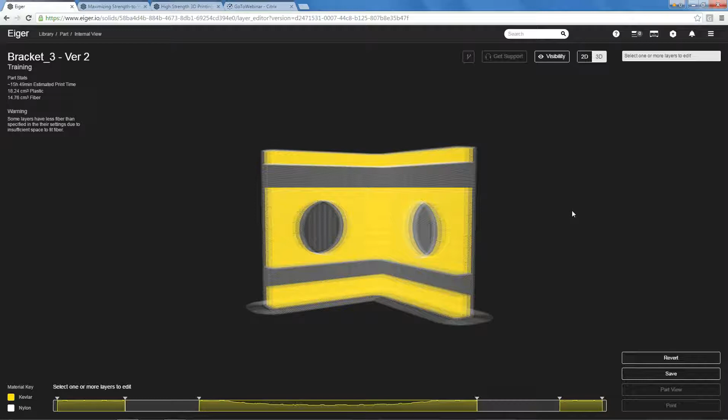Now, the more fiber you have in a part, the longer the print time is going to be. So taking that into consideration, you don't always have to fill a part up with the fiber of your choice. More often than not, it's overkill, but there are going to be times when you need to. Just keep in the back of your mind that the more fiber, the longer the print time, so use it accordingly. I can then save this, and I can print out both of these brackets. I could print the full one and then this version in the same build, and I can have both parts to test in my intended application.

The last part I want to show is the motorcycle brake lever, okay, and it's right here. This is a great part.

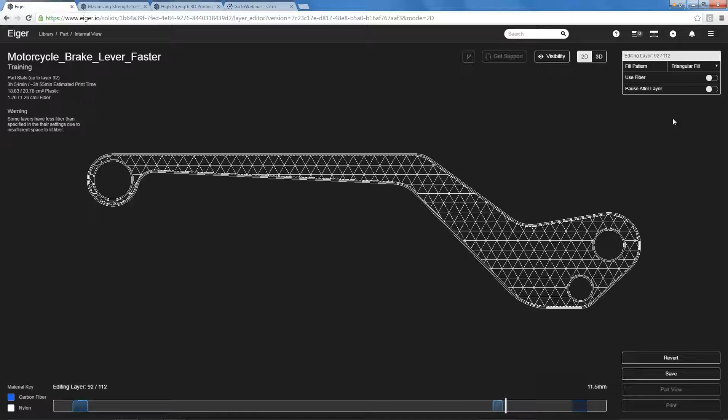So on layer 90, I'm going to turn fiber on. It's going to remember the default values from before. It's going to add 10, which is perfectly fine. I'm going to go to layer 91. I'm going to turn on fiber. Or I can actually hit F on the keyboard, which is a hotkey, and it'll add fiber. And then I'm going to go to layer 92. I'll hit F again on the keyboard. And now we've created our sandwich panel construction for this particular part. Let me turn off the triangular fill so we can see it.

Okay, so this created a sandwich panel. We had to create the top fiber group manually, which is very easy to do and fun to do. Now what we want to do is we want to fill the midsection. We could easily have filled the whole part up with 10 concentric rings, but that may be overkill in a lot of situations. Our goal is to use less material on certain parts, but optimize and make it as strong as possible. So what we can do is we can actually come to our 3D view.

We can drag out a selection box in the middle here. And what I want to do here is I want to turn fiber on. And instead of having 10, I just want to have 3. I don't need to have those layers completely filled with carbon fiber. I just want 3 layers. And what I want to do is hit Apply Changes. And we can see in real time how it's adding those layers in the middle.

And we have our part, our brake handle reinforced with carbon fiber. Again, up on the left, looking at the stats, we have approximately 3 hour and 55 minute estimated print time. We're using 15.62 cubic centimeters of plastic, 13.31 cubic centimeters of fiber, and this would create a strong functional part. And this is the type of part, as it's laid out, that you can purchase, and we'll go there in a second after we answer the questions.

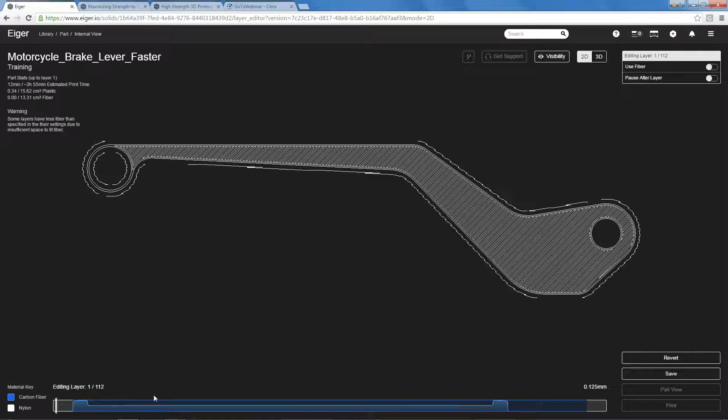Yep. Now, one thing to always remember is that these are nylon parts reinforced with fiber, okay? So let's take a look at this in 2D mode, and we'll take a look at the layers, just to show you again the nylon nozzle path and the fiber nozzle path. For example, here we have these two lines of the nylon nozzle path. We have two walls as set by the default, and again, the blue represents the fiber nozzle path, the blue Kevlar, the blue carbon fiber.

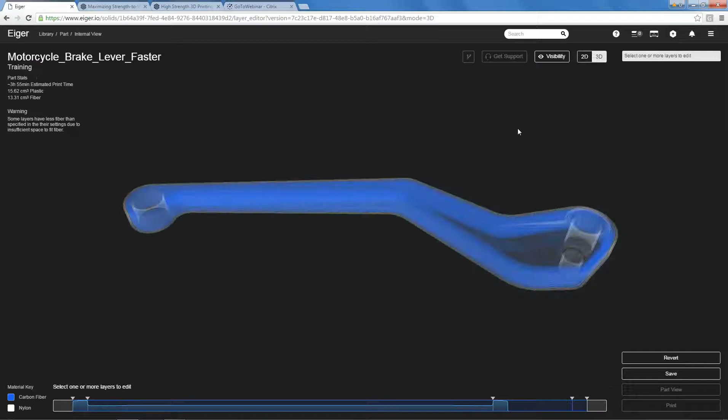If we go to 3D mode, again, using the visibility, we can turn this off. We can turn on the concentric fiber and just look at the fiber. And if we want to just see the outer walls, again, this is a nylon part reinforced with fiber, we can easily do so. I like to turn on these two, and that gives me a nice representation in view of this part. Okay? And that is the Eiger demonstration.

Are there any questions that we can answer? Ethan has been monitoring. Any questions? Anything come in, Ethan? People are curious. I think you just addressed the outside of the entire part is a nylon, but they are curious where else there's going to be plastic if you were to crank the fiber all the way up to 100%. Yeah. What's holding the fiber together, and how is it possible that it's not a purely fiber part?

Yeah, I mean, all of the parts that are produced on the Mark II have an exterior nylon wall. You can go down to one wall, you can go up as high as 4 walls, okay? If you would like it to be one wall and it's not going to collide with any other parts, you can certainly do so. When you add fiber throughout a part, wherever fiber can't be added, nylon will be in its place, but you have total control over that. Let me first save this, and we'll go take a look at our simple cube, and hopefully that'll answer the question.

Okay, so let's just import another cube just to start from scratch. Here we have our box model, and we want to add fiber all the way throughout this part, okay? We're going to simply use fiber. Again, I like using the Kevlar. We'll use Kevlar. I'm going to add an infinity value here. Again, we can choose whether it's concentric or isotropic.

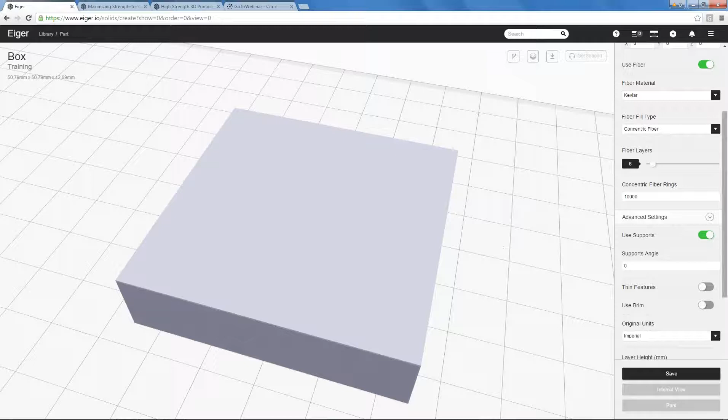We're going to stick with concentric now just for consistency, but I'm going to put a very high value in here. And this is going to tell Eiger to try to put as many rings as possible in this particular box, okay? Then what I want to do is simply use the defaults, and I'm going to save this. And this is going to replicate exactly what we did earlier on, but we'll take a closer look at it.

This is a good question. What is the minimum area for reinforcing with fiber? So what's the smallest area that we can actually add fiber to? Yeah, the smallest area, you need a cross-section.

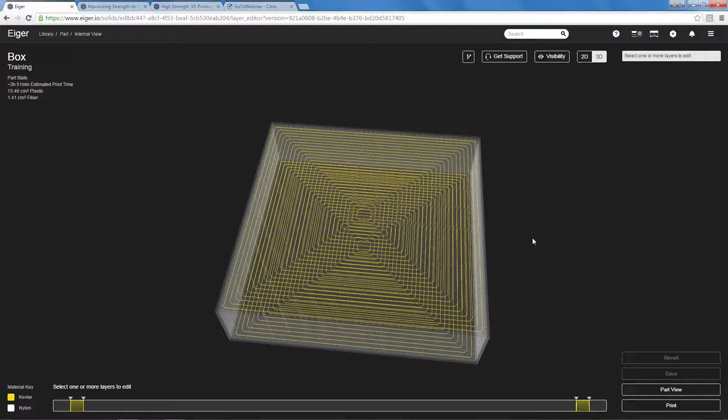I do have a part that I can bring in that shows that, and I'll open that part in just a second. And that's going to be a function of how many walls you decide to have, but I will bring in a very small part and hopefully answer that for you. It's roughly about 9 millimeters in diameter if it's circular, and you're going to use concentric. But again, going back to the 45 square millimeters on a rectangular type basis. But I do have a small part that does kind of show that. But let's first address this, and we'll move on to that.

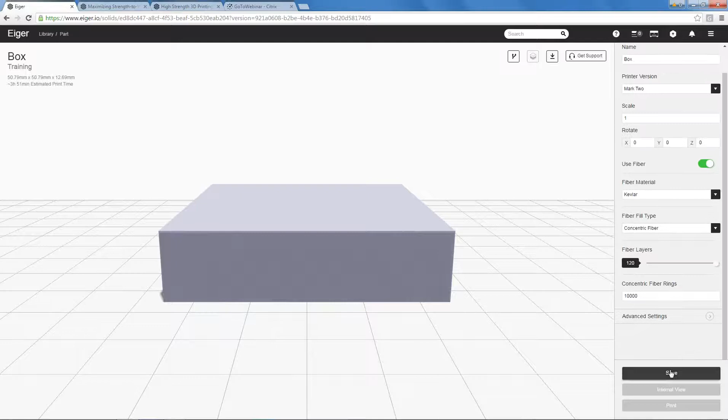Okay, so in this particular part, based on our part settings, we have 2 outer walls, and we have the nylon. So again, these are nylon parts reinforced with fiber. What happens? Oh, my apologies. I don't know why it didn't fill all the way up. Let me go back to it here. I forgot to slide the slider up. I didn't completely fill it. Okay. Let's go to our internal view, go to 2D view, and we'll take a look at it.

All right, so we have our 4 layers of nylon on the bottom. We could easily have changed that within Eiger. We can go to the roof and floors, which is set to 4 by default, and we can lower that down to 2 if we so desire. But this is the outer part of our part, and inside we have our concentric Kevlar. If we turn on our rectangular fill so that we can see that, wherever there isn't fiber, there's going to be nylon.

And how this all becomes Kevlar in this case, is that the Kevlar fiber from layer to layer will bond to each other and create a very strong part. I hope I answered that correctly. Hopefully. We have a question about what is the best way to align a part that includes threads. So what's the best way to align a part on a print bed if you're adding embedded parts?

Yeah, if you're going to do threads, to maintain dimensional accuracy with threads, your best bet is to orient it so that the hole is in the Z-axis. That's not unlike any other 3D printers. So whether or not the fiber will reach into those threads, depending on the size of the part you're bringing in, that's where you may want to use isotropic with some concentric rings.

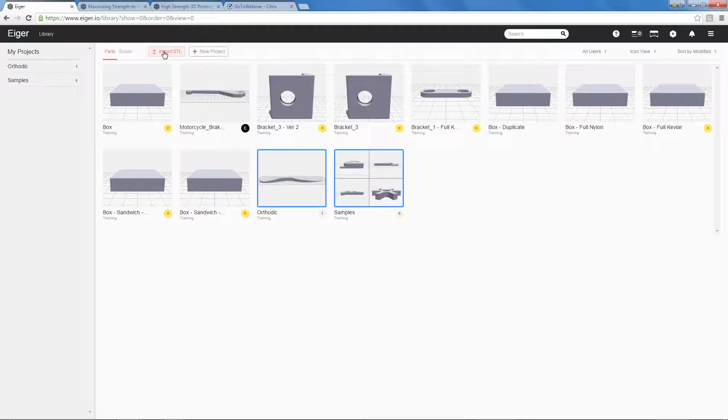Is it possible to print with more than one type of fiber in the same part? No, you can only stick with one type of fiber. You're going to use nylon and Kevlar, for example, or nylon and fiberglass. You can't mix fiber types together. Do you have any good recommendations or tips or tricks for getting strength in both X and Y and any other tips to add strength to the Z direction?

Yeah, when you want to add strength throughout the part, the best way is to use isotropic. Isotropic, as mentioned earlier, the material properties are uniform in all directions. If you wanted to create the strongest part, you would use isotropic and you would use carbon fiber, wherever it could fit it, and that would create the strongest part possible. Now I'm going to take a look at this part because they'd asked about the minimum features.

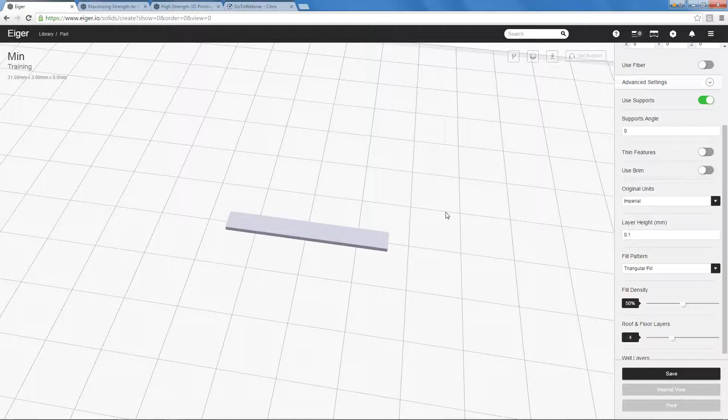All right, so here's a part that kind of represents what you can think of when it comes to minimum features. As mentioned before, the minimum length that you can print out of the Mark II is 40 millimeters of fiber. And you need to be able to lay that fiber down, and you need roughly a cross-sectional area of about 45 square millimeters or a diameter of about 9 millimeters, and it's going to vary.

As you saw before, you have total control over reducing the number of walls to allow for a greater cross-sectional area, or you can actually use the thin features, and the thin features, as we saw in that bracket with the two holes, were able to squeeze in an extra ring of fiber. Now in this case, this is a particular model I show folks, and it can vary from geometry to geometry, but I think this is best representative of the minimum features that folks often ask about.

What I'm going to do is I'm going to use fiber. I'm going to use my good friend Kevlar, and I'm going to try to fill this up. I'll leave it on 2, but I don't know if it's going to fit 2, obviously. And I'm going to leave all the default values, and I'm going to click Save.

And if we look in the upper left, again, you always refer to this. It gives you the stats of the part. We're using 0.12 cubic centimeters of plastic and 0.01 cubic centimeters of fiber. And we're going to take a look at this in the internal view, and we're going to look at it in 2D mode. In 3D mode, we can certainly see that one ring of fiber. Let's go to 2D mode. And we can slide our slider to that one ring.

And as mentioned earlier, the width of the actual nylon wall is 0.4 millimeters, so we have 4 of those, so we have 1.6 millimeters, and then of course the width of the actual fiber itself is 0.9. The fiber often has to loop around and end where it started, like this represents here.

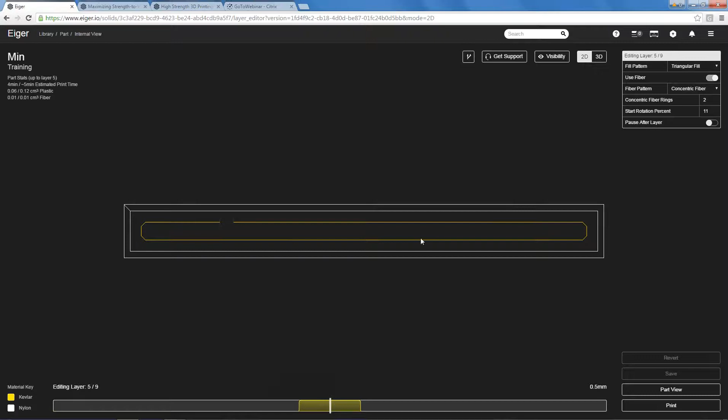So in this particular case, if we look at the extents in just a moment, here is a perfect example of a part with 2 walls, with the fiber looping back and ending where it started, and this I believe is almost 4 millimeters. Yeah, the extent here is 31.99 millimeters by 4 millimeters, so the width of a wall is roughly between 3 and 4 millimeters, and it may vary. Again, you need that overall cross-sectional area to sustain the minimum length of fiber, which is 40 millimeters. So I hope I answered that question with the minimum requirement.

What other questions do we have, Ethan? Let's see. Why is there a gap between where the fiber starts and ends? In the visual there where you see the small gap between the tips of the fiber path? Yeah, the algorithm generates that. Obviously, you wouldn't want them to overlay each other. It could actually potentially pull it up. That's something that our software engineers had designed. I actually don't know the correct answer to that.

I apologize. I think it's just visually the way the software will show it. That's the beginning and end of the fiber, so it looks like it's a gap, but really it's going right up to itself. Yeah, that's actually a good question. I'll have to find out the answer to that. I apologize.

Any other questions? Just what's the best way, when you're embedding parts, to make it adhere to the inside of the... Oh, yeah, that's a great question. Often what you can do is glue them in. You can use a CA, cyanoacrylate, or crazy glue, and that's what we recommend. Obviously, you don't want the insert to exceed the layer height of the cavity that you created. Otherwise, there's the risk of the nozzle colliding with it and causing a dislocation error.

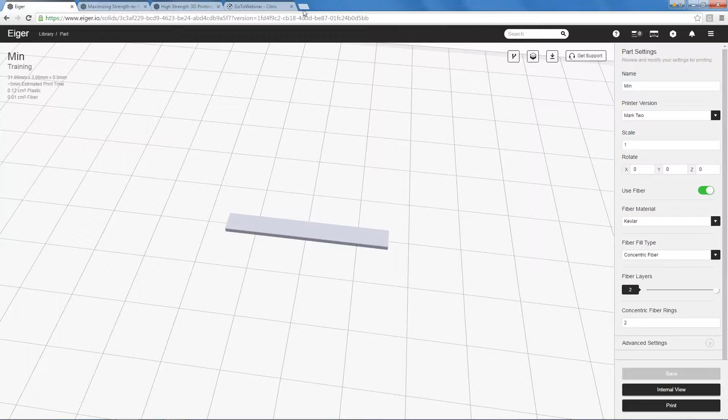Any other questions? Let's see. Do you have any other features about the Mark II specifically versus the Mark I that we have a chance to talk about? Yeah, this is an Eiger demonstration, but I'd be more than glad to talk about that. The Mark II is a great printer. We've made some improvements on the inner hardware. The first major improvement: as mentioned earlier, with the Mark I, the minimum fiber length was 610 millimeters, which is rather long. You needed a cross-sectional area to sustain that minimum requirement of roughly 1 square inch.

What we did is we moved the cutter from the left-hand side of the chassis. If you open the lid, it was on the left. We actually moved the cutter to the head. We improved the fiber extruder. We improved the print head. We improved the nozzles. Overall, it is a super printer. In fact, the Mark I that I had at home is being upgraded right now to a Mark II, and I eagerly look forward to getting it back.

And again, the Mark II allows for the minimum fiber length to be 40 millimeters. I can't stress it enough. You're now able to add fiber to much smaller parts and much smaller geometries. It's absolutely beautiful work by the design engineers and the software engineers.

It's amazing what they've been able to accomplish on this second iteration of an already great printer. The Mark I's still a great printer, but there are limitations. Any other questions? That's good.